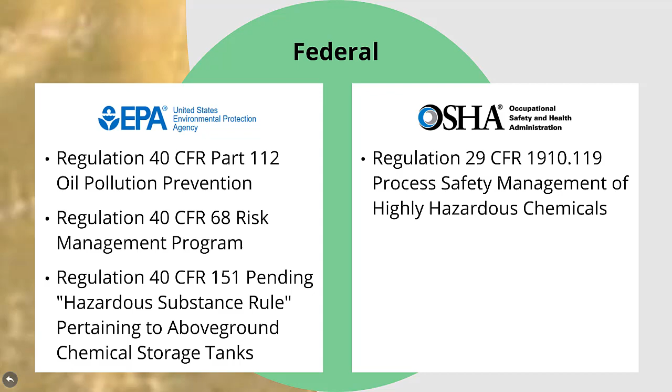Here's a summary of federal and state examples of regulations at law, plus a way to learn more. Federal regulations include Environmental Protection Agency, or EPA, 40 CFR Part 112 Oil Pollution Prevention, 40 CFR 68 Risk Management Program, and 40 CFR 151 covering the pending hazardous substance rule pertaining to above-ground chemical storage tanks. Also included is the Occupational Safety and Health Administration, or OSHA, Regulation 29 CFR 1910.119, Process Safety Management of Highly Hazardous Chemicals.

State examples include the Massachusetts Fire Marshal 502 CMR 5.00, New York DEC Title VI, Chapter 5, Subchapter E, Part 598, New Jersey DEP Title VII, Chapter 1E, and Pennsylvania DEP Title 25, Chapter 245. These laws include inspection of tanks ranging in size from 185 gallons to over 10,000 gallons in capacity. There are over 20 states in the United States with above-ground storage tank regulations at law that are like these examples. To learn more about inspection laws, watch the YouTube What is FRPI 8310 Inspector Qualification About for a summary.

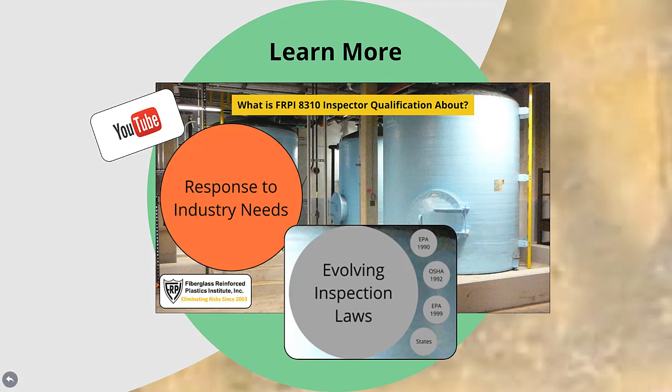This story is presented in the Response to Industry Needs Evolving Inspection Laws section. Also research the laws on EPA and OSHA websites for the entire story.

Validate company leadership. Most, if not all, employers voluntarily claim their FRP tank inspectors perform high-quality work. Think about it for a second. Who would claim to clients, insurance companies, or regulators that their work is anything less? Consequently, the high-quality claim is overused in industry and essentially has little meaning itself. This leaves a lot to the imagination of those learning about and wondering what the value offered by inspectors really is.

Employing FRPI 8310 inspectors exemplifies providing a cutting-edge, state-of-the-art inspection best practice, which quantifies what claims of high quality specifically amount to, and validates company leadership as a result. Value behind this validation includes the standard of excellence, minimum requirements, third-party vetting, ongoing credentialing, and, by virtue of this value offered, being a part of an elite group. Let's take a quick look at what these values amount to.

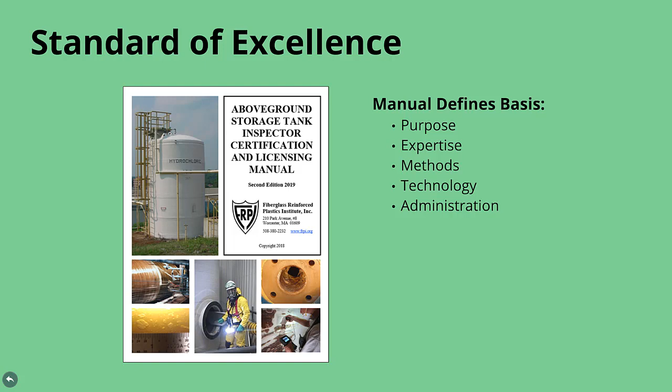The standard of excellence is set by the FRPI Above-Ground Storage Tank Inspector Certification and Licensing Manual. It defines the basis for what high quality means through providing valuable guidance for inspection purpose, expertise, methods, technology, and administration.

Minimum requirements establish expectations for inspector qualifications, scope of inspection, decision criteria, and reporting. Where qualifications are defined by a body of knowledge, personal education and experience at different levels, type of employment, plus a certification exam.

Third-party vetting by an industry organization provides impartial second opinions of employer claims made about inspector expertise, where this opinion is based on auditing credentials and checking references for FRPI 8310 inspector candidates following a standard practice. Additionally, FRPI courses are RCEP compliant.

Plus, FRPI is pursuing a USPTO registered certification mark and ANSI accreditation for SP 8310.

Ongoing credentialing helps assure value is upheld year after year, following an initial credentialing with a badge issued and license signed. Assurance comprises annual license renewal with employment check if the inspector is in good standing, a 3-year certification renewal cycle including current knowledge base, experience, and continuing education checks, plus a 6-year cycle adding a body of knowledge check by exam.

Being associated with an elite group can only add value through demonstrated qualifications, a defined minimum scope of work, and predictable performance. Scope includes an inspection and test plan, decision criteria, plus report writing. Predictability stems from following a required industry inspection protocol, ethics commitment, and obligations when applying the FRPI Mark of Excellence.

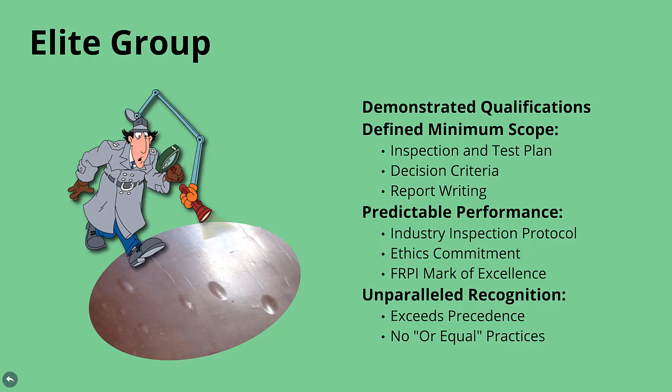Improved inspection results. Not considering consequential damages, it's estimated that FRP above-ground storage tank premature failure costs industry over $107 million per year.

FRP is a complicated material of construction, and all too often not given the respect it deserves by specifying engineers, plus job shop manufacturing operations.

While FRP has earned great respect and a position as the material of choice for numerous chemical applications, its performance is less predictable and state more difficult to assess than mass-produced, homogeneous, standard grades of materials, such as steel and thermoplastics. These circumstances place a large importance factor on FRP tank inspector expertise and bona fide qualifications.

Employing FRPI 8310 inspectors gets improved inspection results for asset management, given decision criteria that leads to incident prevention and hardship avoidance. The following short story pulls these elements together and puts a price tag on the value achieved.

Asset management is defined here by the Environmental Protection Agency as a 10-step process. This process illustrates just how vulnerable tank facility owners are to the quality of work their tank inspectors perform at.

Step 2, assess performance in failure modes, plus Step 3, determine residual life. Poor decisions made at Steps 2 and 3 have a remarkably huge effect on the following Steps 4 through 10, where cost management, level of service, business risk, investment needs, funding requirements, and planning are largely impacted.

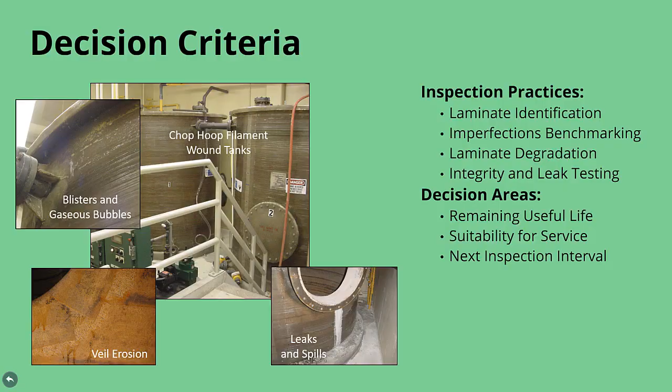Other methods include providing a means for arriving at decisions such as remaining useful life, suitability for service, and next inspection interval. Incident prevention is the underlying objective for certifying and licensing inspectors in accordance with the FRPI Standard Practice 8310.

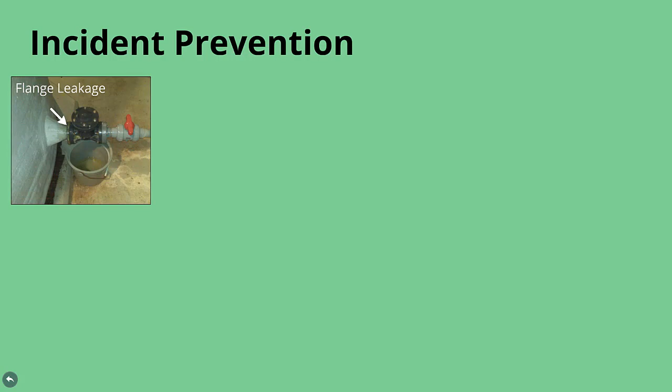Avoiding events such as flange leakage, bottom leakage, shell buckling that can lead to a split and spill, plus a full bottom separation and resulting spill, is essential to sound asset management practices. Improved inspection results can help prevent these incidents.

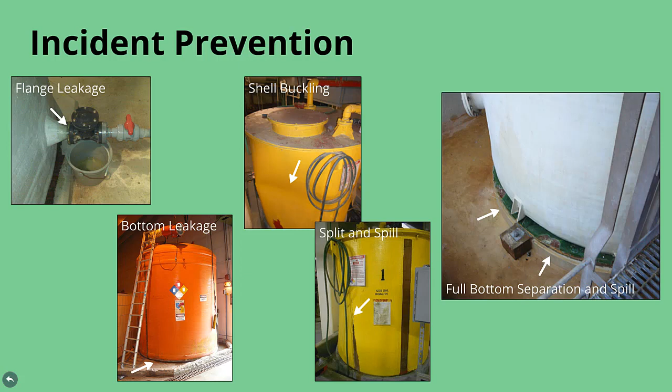Hardship avoidance is also of keen importance for more catastrophic events, such as premature failure of multiple tanks with integrity issues in the first few years of service.

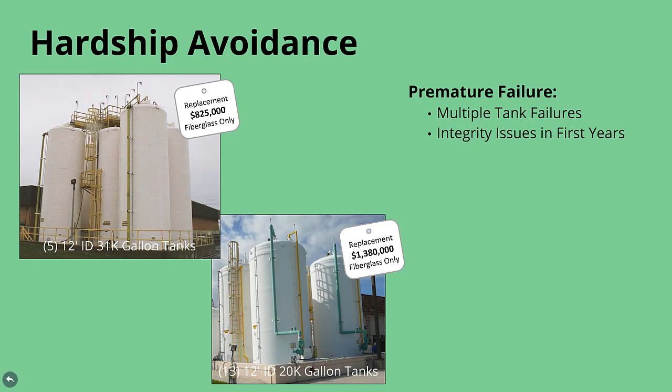Here are 2 sodium hypochlorite storage facilities, the first with 5 31,000-gallon tanks, and the second with 13 20,000-gallon tanks. All tanks had to be replaced due to excessive laminate degradation and leaking. The 5 were replaced at a cost of $825,000, and the 13 at $1,380,000 for fiberglass only. These were unplanned capital investments.

Costs associated with consequential damages for such incidents have included product loss and cleanup, related infrastructure replacement, diminished level of service, lost sales and income, environmental damage, injury and loss of life, harm to reputation and goodwill, plus fines, penalties, and lawsuits. Improved inspection results can help avoid these risks and costs.

Capture business opportunities. Whether an employer of inspectors is an owner end user, inspection and testing company, manufacturer, insurance provider, or regulator, employing FRPI 8310 inspectors satisfies needs and opens up doors to a lot of business opportunities that can be captured by the savvy entrepreneurial types.

Opportunities fall into many categories. They include, but are certainly not limited to, workforce development, commercial gain, facility risk mitigation and operations control, leveraging public relations, plus return on investment.

Now we'll run through a quick overview of opportunities under each of these categories, so the obviously good ones can be noted quickly. Then we'll show how to take action, since capturing them simply makes good business sense.

Workforce development opportunities available for inspectors include endorsed expertise level, higher education, employee advancement, cross-training, plus succession planning.

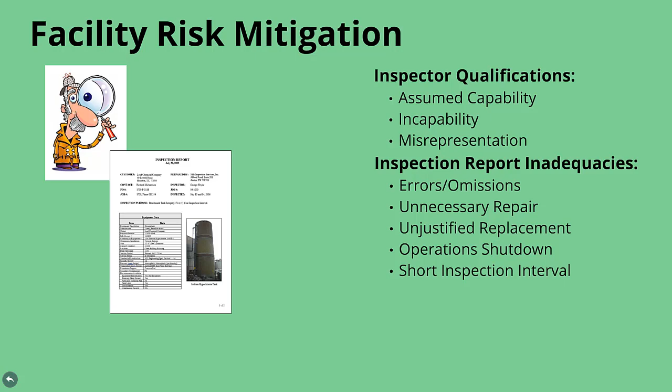Surprise tank failure may also be averted, which would minimize the threat of safety and environmental incidences, insurance and legal entanglements, plus corrective action costs. On the flip side, inspection and testing companies plus manufacturers can tout minimizing these risks for their clients.

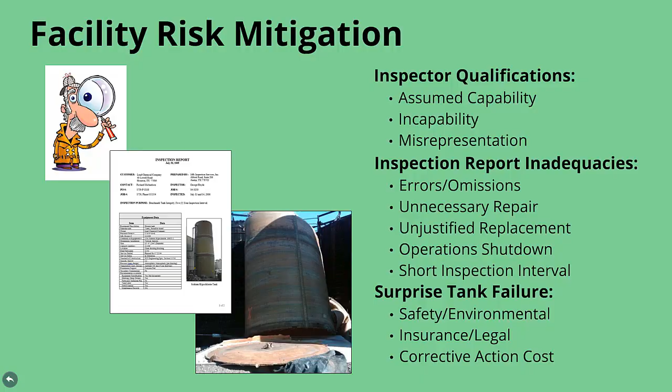Facility operations control is another very big opportunity for owner-end users who employ their own FRPI 8310 inspectors. It enables them to minimize outsourcing, realize more inspection schedule flexibility, do strategic report writing, better manage asset investment, reduce cost, protect trade secrets, plus get a better handle on risk management.

Owner-end users can also achieve more operations control through strategically utilizing contract FRPI 8310 inspectors to support their small facilities with few tanks, bring in unique capabilities, obtain more optimal cost and value, improve inspector availability for emergency and large shutdown work, obtain a second opinion, plus supplement risk management efforts.

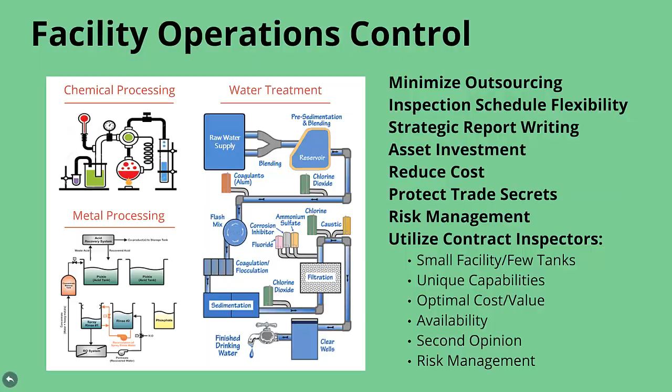Leveraging public relations can strengthen company image, minimize risk exposure, augment marketing efforts, increase company visibility, and build more relationships. Image can be strengthened in the areas of corporate and social responsibility, subject matter authority, industry leadership, community impressions, plus reputation.

Risk can be minimized for negative publicity, crisis management, and other damage control.

Return on investment resulting from employing an FRPI 8310 inspector has a very reasonable probability of occurring within less than a 1-year payback period, especially for early adopters taking advantage of market billing rates with as much as a 2.4 multiplier from low to high.

ROI variables include number of tanks, asset management cost, cost of compliance with law, inspection results and efficiency, billing rates, base, new, and lost business, failure incident probability, plus inspection intervals and time.

Besides the billing rate scenario, potential successes may stem from workforce development, other commercial gain, facility risk mitigation and operations control, plus leveraging public relations.

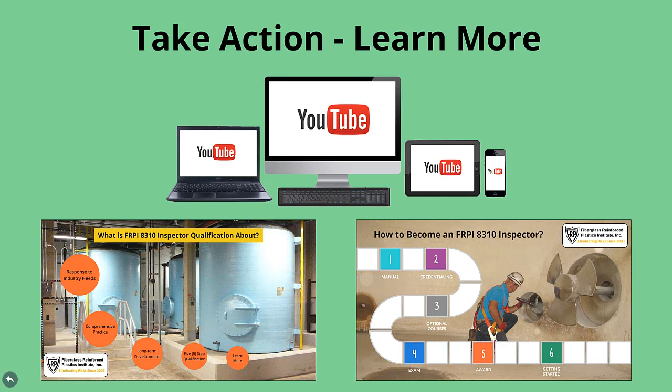Take action now. Learn more about the FRPI 8310 Inspector Program. Watch these YouTube mini on-demand webinars titled, What is FRPI 8310 Inspector Qualification About? And How to Become an FRPI 8310 Inspector.

Ready to get started with further exploring and using the program? Purchase the Inspector Manual containing the certification practice and materials technology now.

Then, receive the Inspector Packet, which includes credentials and exam seat applications, license agreements, a fee schedule, plus the checklist showing steps for becoming an FRPI 8310 inspector.

There you have it. That's the many reasons why you should employ FRPI 8310 inspectors. Thank you again for your interest in tuning in with us. We hope to see you enjoying the immediate rewards that this program has to offer soon.